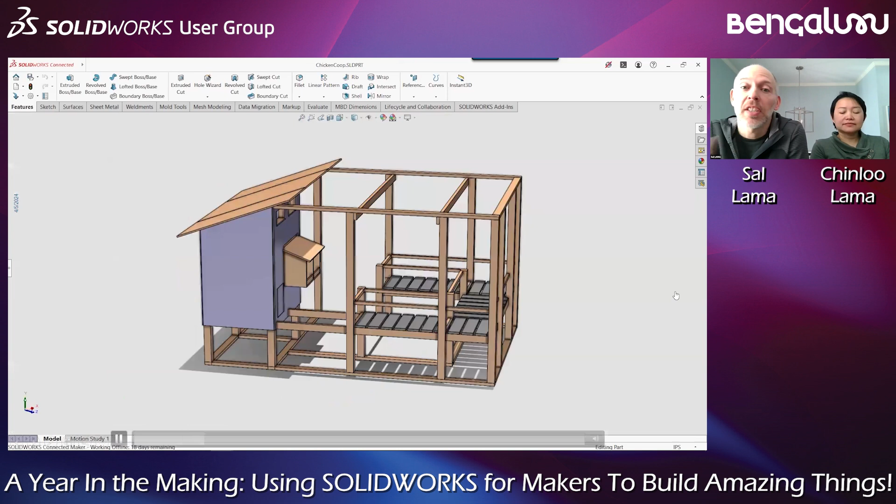Sometimes the software we're going to choose kind of chooses itself. This is a chicken coop garden that we built for my father last year. We knew it was going to be a bunch of structural wood—2x4s, 4x4s—so weldments immediately sprung to mind. Because SolidWorks has weldments and X Design doesn't, we chose SolidWorks because it was the most appropriate tool for the job.

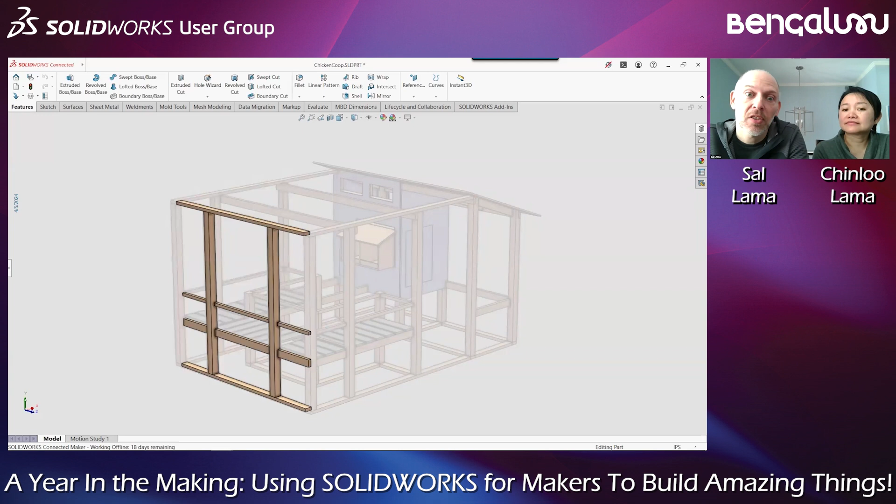What's cool about weldments, if you haven't used it before, is it lets you build geometry like this super fast. But then it also has the downstream benefits of giving you cut lists and making the drawings and all this other stuff. We actually packed the car up with our tools, drove 20 hours to visit my parents, and worked in their backyard cutting up wood and building a chicken coop.

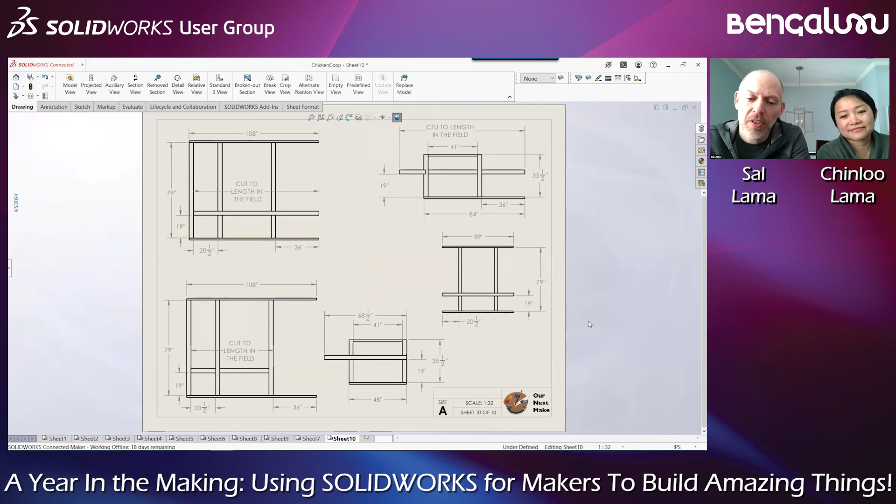Having these drawings on hand and being able to get the cut list so we could go order the stuff at the home center was a lifesaver.

Another example of where the software chose itself was this project where we built a standing adjustable desk. We were working at home quite a bit last year, and we wanted to build something out of cardboard or corrugated board. Although corrugated board folds differently than sheet metal, we knew we could get pretty close to a flat pattern if we used SolidWorks sheet metal.

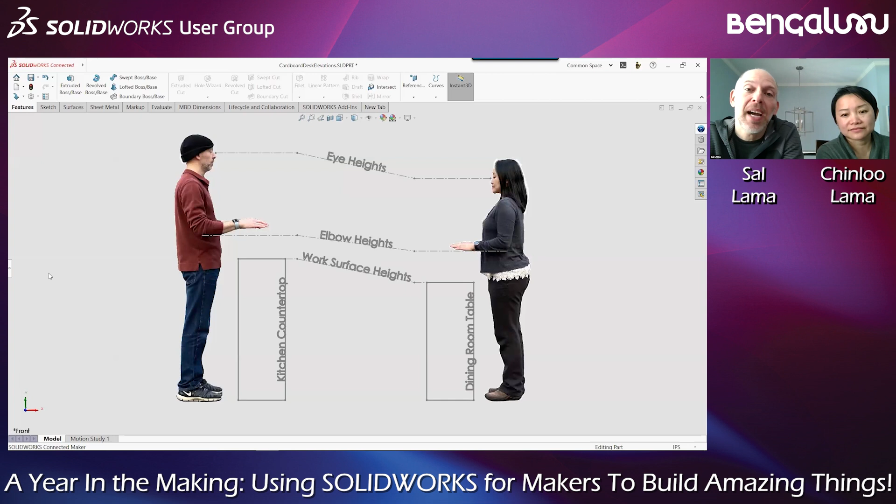So we used SolidWorks sheet metal to flatten out the corrugated boards. I don't know if you've ever been immortalized in CAD before, but there we are, Chinloo and me, standing inside of SolidWorks. We built this adjustable desk system so we can bring our laptops or iPads up to the appropriate height.

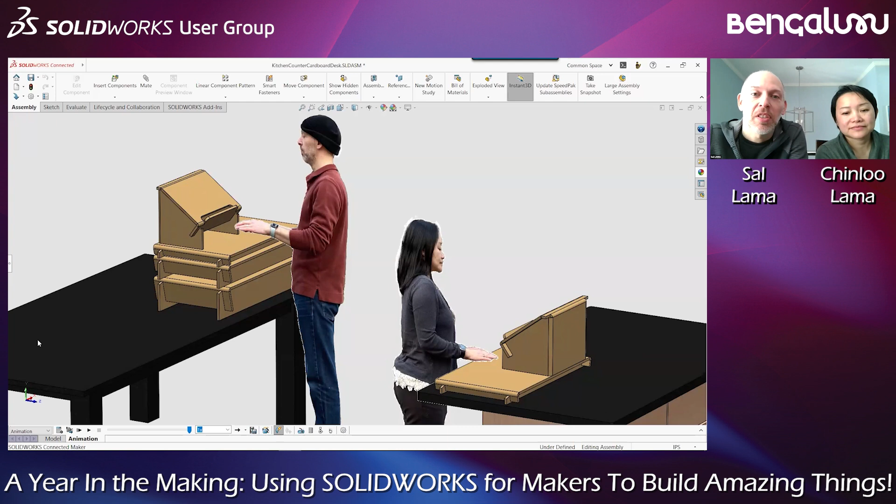Again, that was a choice for SolidWorks. One last case—this is our can rack. We go through a lot of cans of beans in our house; that's our favorite form of protein these days.

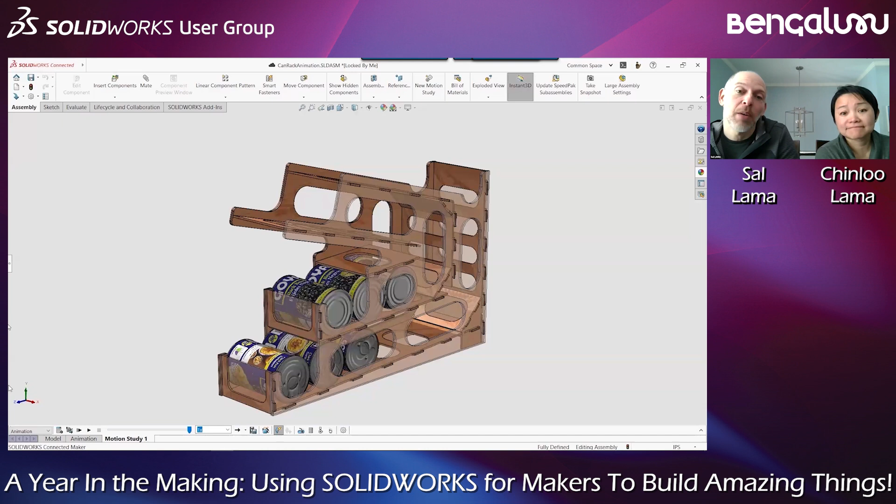Because I was going to use tab and slot quite a bit to hold these pieces together, and SolidWorks has a great tab and slot command, we went right to it. We're very much proponents of choosing the right software to get the job done, and these are three examples of where SolidWorks was the go-to choice.

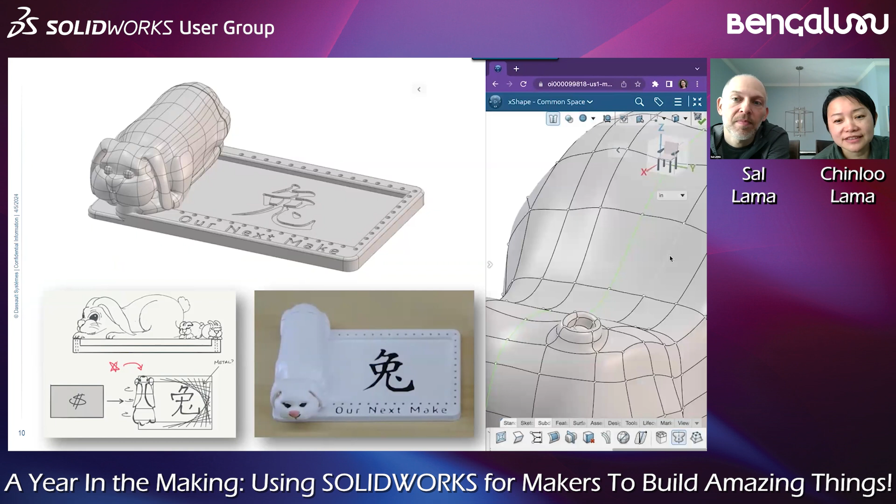In some of our projects where we knew we wanted to incorporate organic shapes, what you see on the right is a little hippopotamus rest for chopsticks or paintbrushes. On the left was this fun rabbit gift card holder, something I wanted to explore if we could 3D print directly. Having X-Shape with the subdivision modeling engine, I was able to do clay-like pushing and pulling of the pieces and get close to what I was looking for. It was very enjoyable.

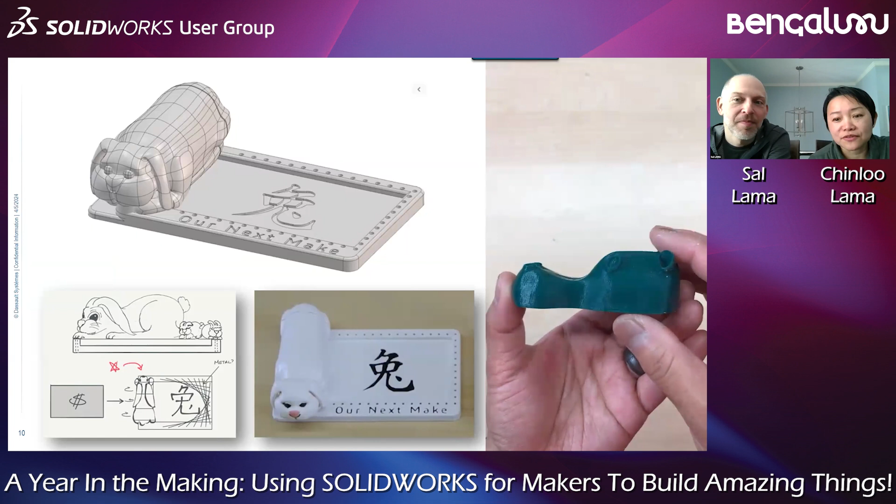I'm not an expert in any way, but being able to get something in my head, as you can see I sketched a few things out, and still get all of the connections and mechanisms working. The rabbit on the left actually spins and has multiple movements. We had little dimples in there to hold all the pieces, and it was really nice to hop between X-Shape and X-Design, or even stay within X-Shape to do all of the Boolean work I needed before I printed.

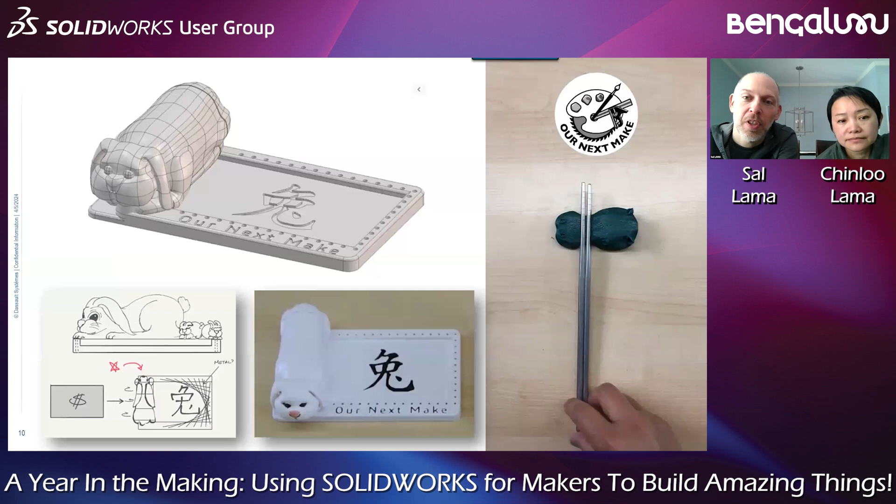I thought I heard somebody try to come online. Was there a question? We can pause anytime. No? Okay, all right. Again, don't be bashful.

So also within the Makers offering, we have the web apps, as we mentioned before, with X-Shape being one of the modeling tools. X-Design is also one, and we often rely on the ability to access the software on a mobile device.

One of the southernmost states of America, in the summer, trying to build a chicken coop. That's just my parents' garage, and we're getting the dimensions we need to build the project. So no hauling pieces of paper, we just pulled out a device and talked about it for the day and went on.

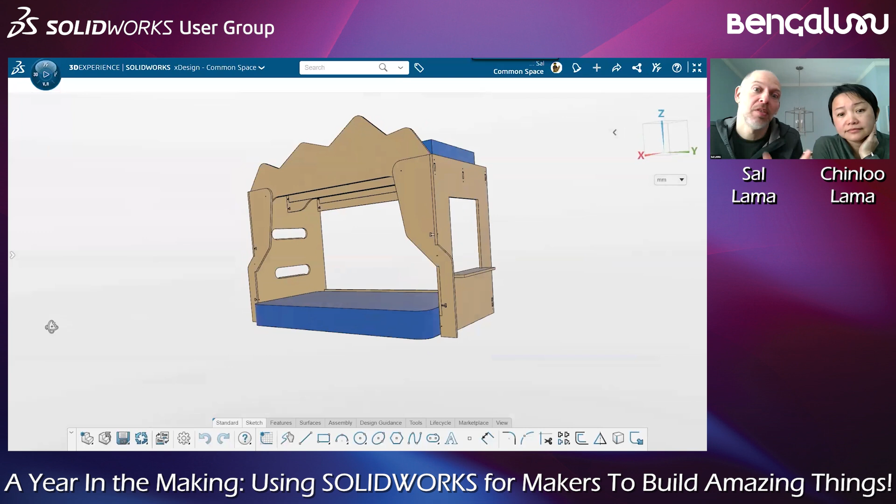Home by Me is a free online tool that runs in a browser, meant to build your home, lay out your home design, but any sort of building really. What you just saw there was a bunk bed that I designed for our son. Our son was in college and moving out of the campus dorms into an apartment, sharing a very small bedroom with another friend, and he said, Dad, we really need a bunk bed.

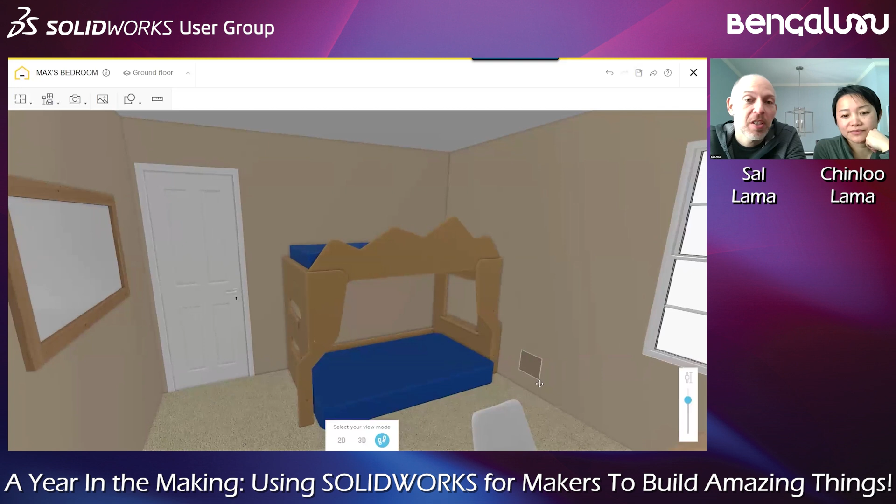And so I designed it in X-Design, but then to see how it would look in his bedroom, he gave me the dimensions, and in Home by Me, I was able to quickly model the room, put the bed in the room, and feel what it would look like, before we ever actually cut anything. So Home by Me is just that next really cool level.

You can use it all by itself and just use it to design a home, or you can use it as we did to bring X-Design geometry or X-Shape, and even SolidWorks, so it doesn't matter. You can push the data up into Home by Me.

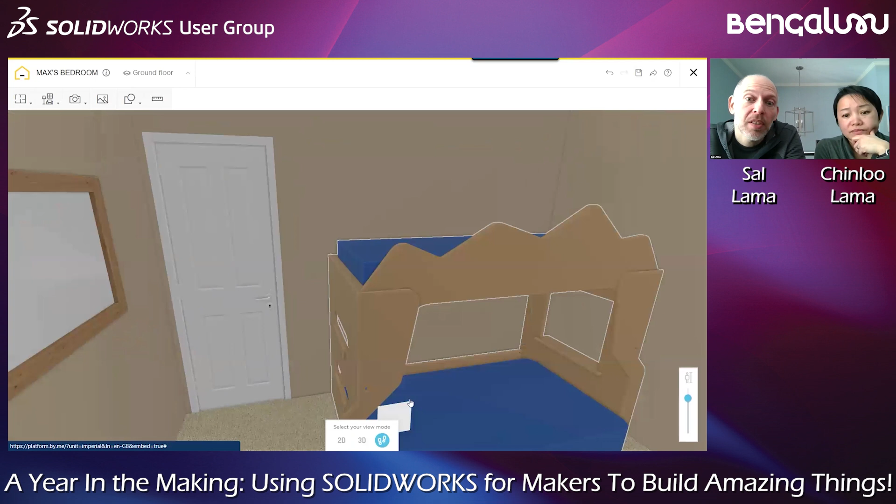What's even more cool these days is X-Design, all the X apps have the ability to pull Home by Me data back into X-Design. So if you want to actually model your bunk bed while you're in your bedroom, you can actually pull that model into X-Design and continue to design. So it's really a cool blend of the two technologies. So that's Home by Me.

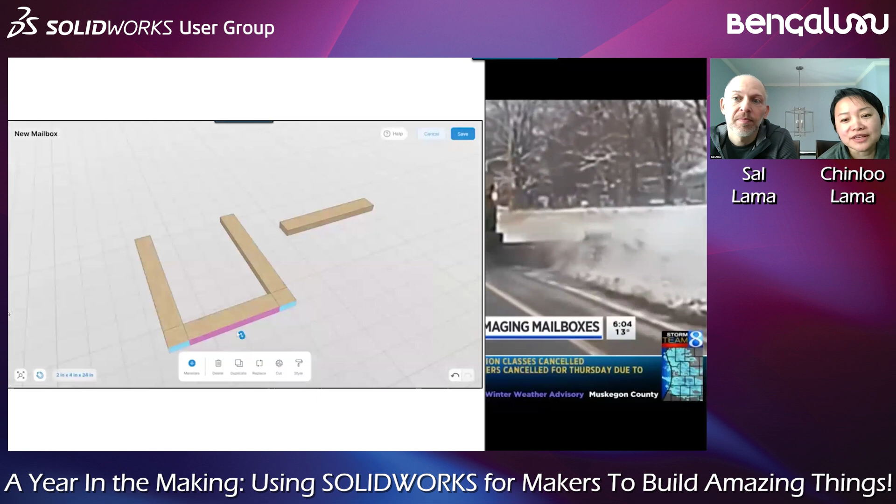And for me, one of our projects was to update our mailboxes. You can see here in the video on the right, we get a lot of snow here. So our mailboxes tend to get demolished by the annual snow plow. And for us to really quickly capture some ideas on a new design, I leveraged Make by Me.

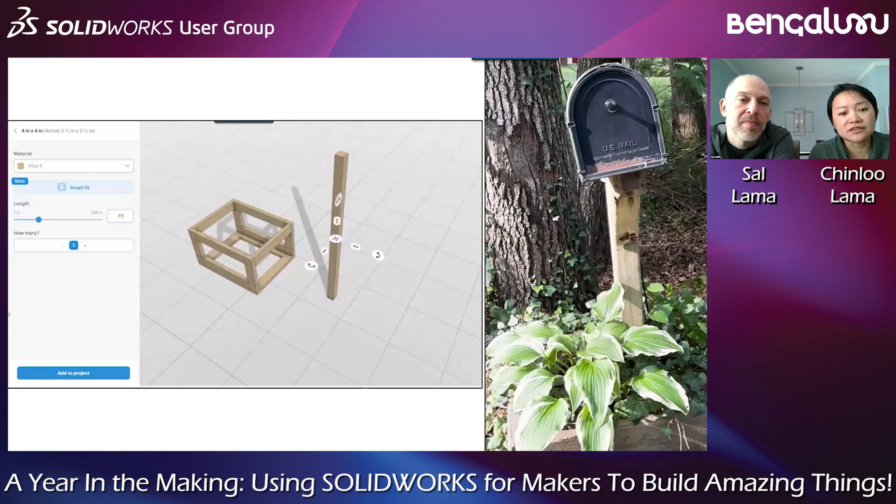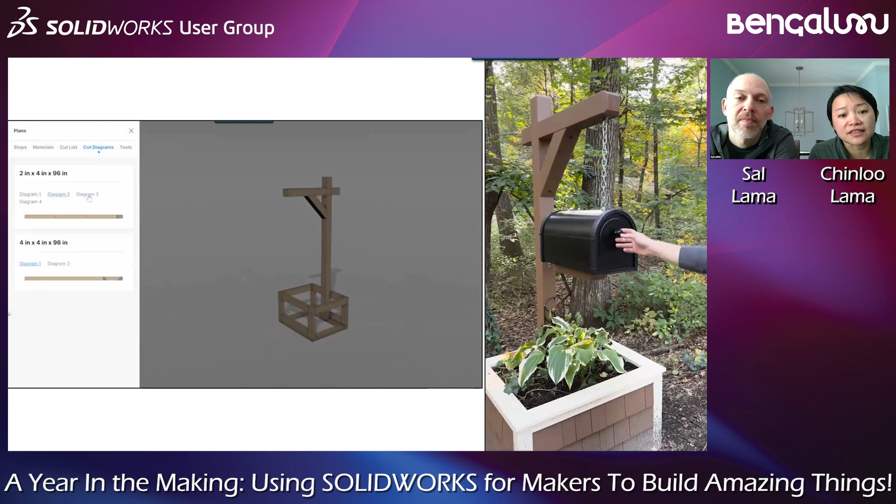Make by Me is this free online tool that allows you to pull your creation together, but using traditional lumber, standard lumber pieces that you would actually pick up at a home center. And so being able to just go out there as if I'm in the shop pulling some expensive pieces of lumber together, I could do this virtually and just snap pieces of wood together and understand how much I would need, how it looks. It comes with a cut list and plenty of information that allows me to then communicate with Sal about, is this a design that we want to work with?

And I think we built like 3 different variations in Make by Me before we decided that this is the one we wanted to go with. So a very quick tool to ideate, but also practical to actually bring it to fabrication state.

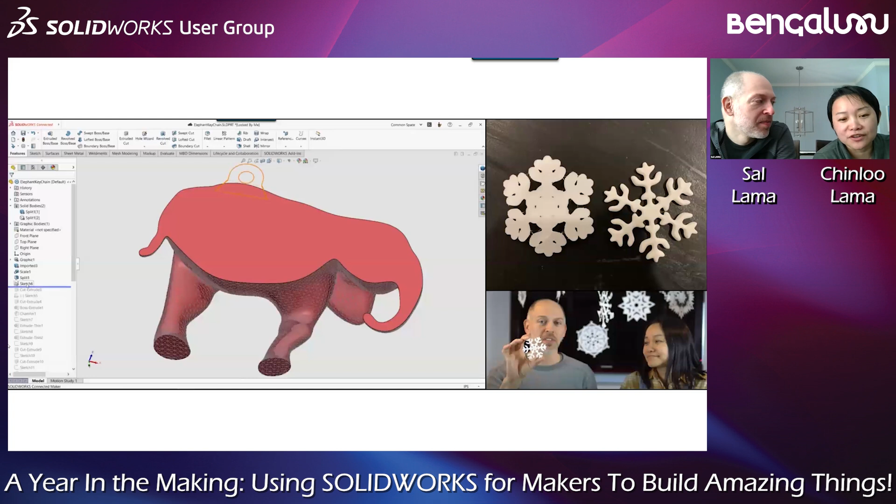And for apps for kids, I know the name sounds like it's for children to play with. I'm sure you guys have seen this before, but if you haven't, it is like this digital clay or Play-Doh tool that kids can go in there and just mush together and play. And I had fun in one of my exercises designing this endangered species of elephant from Asia.

And Sal was inspired by seeing this elephant and thought we could probably do something more with it and make it into a gift for our nephew. So I was able to export the elephant out, or I think you exported it. Anyway, you could share your creation on the gallery, and I think he might have pulled it from there. But by doing so, you can bring the mesh object over into Solidworks, xDesign, either of the CAD tools, and he was able to build all of the appropriate components to then bring it to reality.

He'll go deeper into that, but also on the right, even though it's a tool for kids to play with, you could see that with a very quick few pulls and push of the digital clay, I was able to also create snowflakes and coasters and all sorts of stuff. So this is not a tool just for kids.

It's all sorts of folks who've never been introduced to CAD through traditional engineering skills, but it's fun, not very intimidating to use, and you can also export to 3D printing. So that's what that's on the screen.

Yeah, the technology in apps for kids is very similar subdivisional modeling as you find in xShape. So if anyone's like, I want to test drive something right now, you can go to apps for kids and play with sub-D technology, which is really cool.

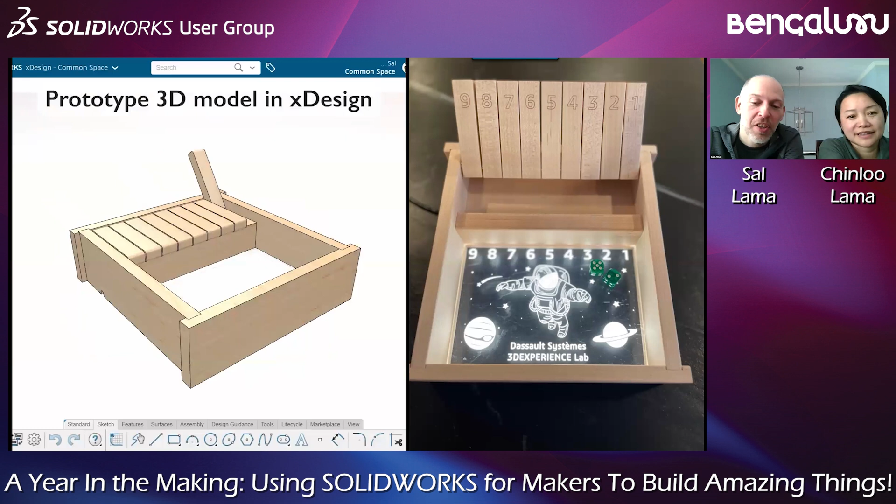That bit was mostly about the software and the designing of it. Now we have to get into more of the making. Above we talked about wanting to show a variety of software to inspire people to design things. In the same vein, we like to show a wide variety of ways to make things, because you can make things with a pair of scissors, a laser cutter, and everything in between. We want to show people that variety.

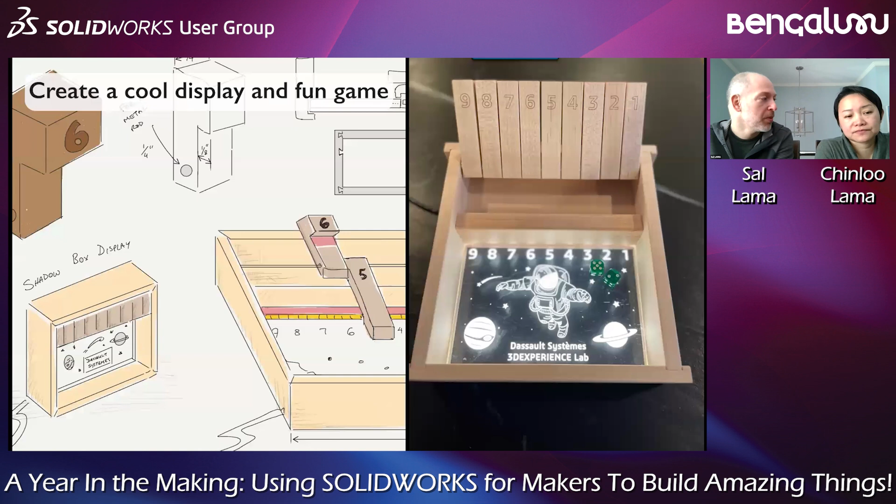So this is one example of that. We created this thing called Shut the Box. It's actually a game. But before we went down this path of creating a game, we were asked to celebrate the accomplishments of college students who had won a competition with NASA, and they came to visit our campus. We thought it'd be nice to give them a commemorative plaque, but wouldn't it be even more cool if we could let them put together their own award, and at the same time have something they can always play with afterwards. So we decided to incorporate a game.

It's called Shut the Box. It's this single player, multiplayer experience where you're throwing dice to see if you can capture the different digits that are now these little fingers on the mechanism. The goal of the game is every time you throw the dice down, you're able to close down the pins that can either represent the number you rolled or combine to meet the number on the dice.

With this concept, we wanted to bring in all the different elements of fabrication we can get from the 3D Experience Lab. It's a fab lab at our office, and we have a laser cutter, an electronics corner, and a CNC. We wanted to leverage all of those to represent this trophy, I guess. So we got to play with light piping, engraving on acrylic, got to solder some wires, and just really work with beautiful wood.

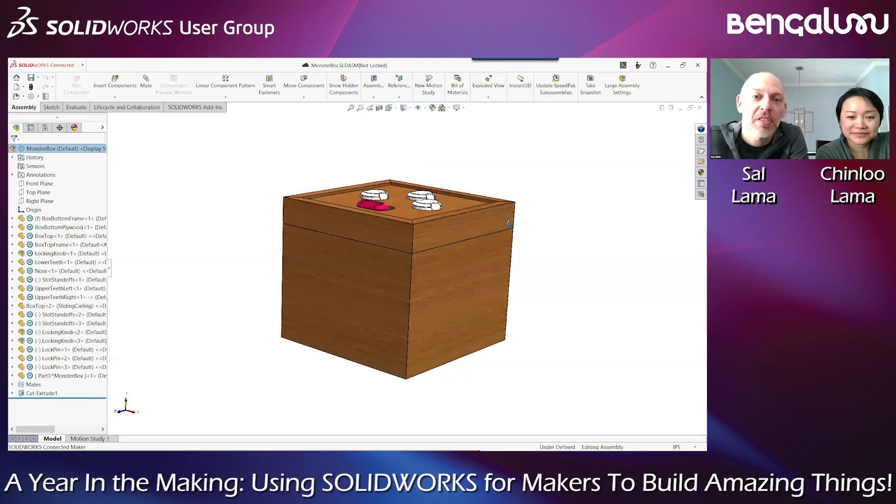This is it in SolidWorks. It's a pretty standard assembly. What's cool about it is the mechanism, so let me show you the animator. We'll talk more about how we use SolidWorks Animator in the future, but this is sort of how the box opens.

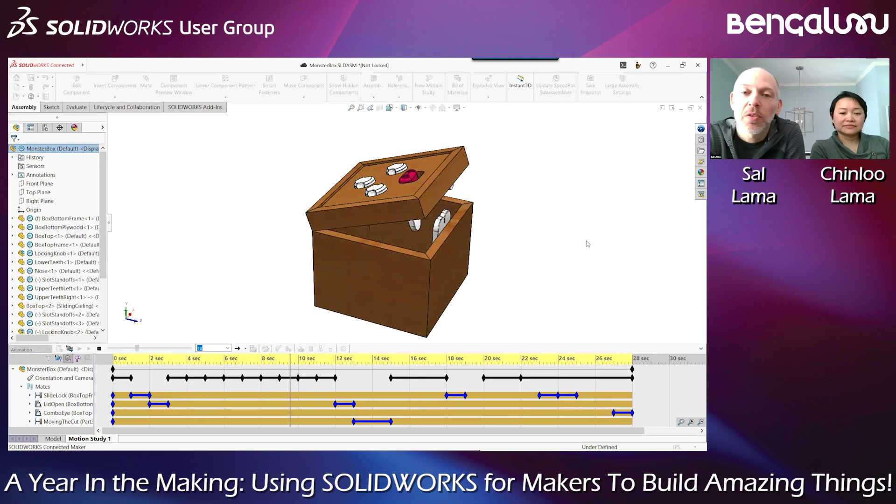You slide the nose backwards, and that unlocks the actual box. You'll get a closer view—there's a little tab that goes inside those two front teeth at the bottom. And then the knobs themselves are actually how you lock it.

If you slide the nose forward, that engages the tab in the front, and then the knobs turn. You see that little black metal pin—right now it's able to slide through a slot in the knobs, but when you turn the knobs, it can't slide anymore.

What's really cool about the knobs is it's a two-piece design, so you can actually take the two pieces apart, re-index that bottom piece into the knob, and basically change the combination at will.

That was a really fun thing to come up with, figure out, and troubleshoot, because the tolerances when working with 3D printing are pretty good, but with wood, sometimes your drill's not in the right spot. That was a really fun project, using SolidWorks in this case to troubleshoot and also to communicate like I'm doing with you here.

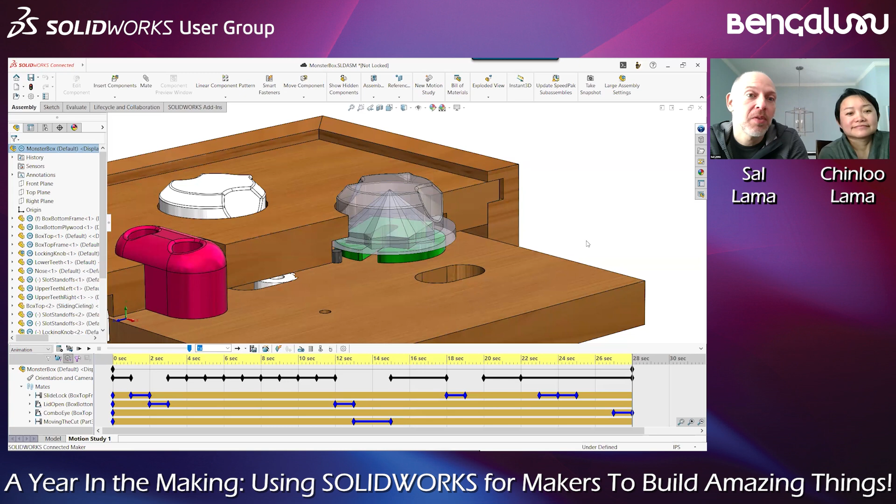We just naturally thought this way and communicated to each other this way, but when we shared this as part of the reel or video on TikTok, Instagram, YouTube, it went viral. It was interesting—we had more than 1 million views on TikTok or Instagram, where people were just commenting and being very inspired or blown away.

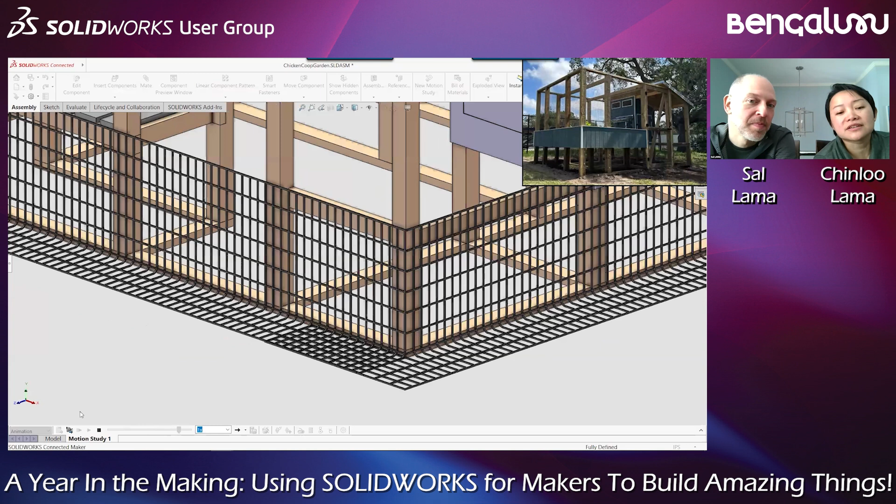One of the comments was like, 'dude was ready with a 3D model to explain this.' It really excited people about understanding what we were trying to say, and engaged folks, allowing them to ask questions both about the software and about the approach.

We went with how we wanted to design it—in fact, this is actually illustrating a solution we didn't take. We had done it differently, and this was us saying, hey, next time when we do this, we would design it this way and fold it over, overlap, to make it even stronger.

So it was appreciated in many forms, but more of the story is that we didn't just use CAD to show or help us build something, but we were using it to show other people how it was working and how they should build it. I think you probably all know that CAD is a great communication tool in your companies and businesses, but it's great for just anyone to understand.

Jimmy, was that you about to come online? I thought I saw your name. Yeah.

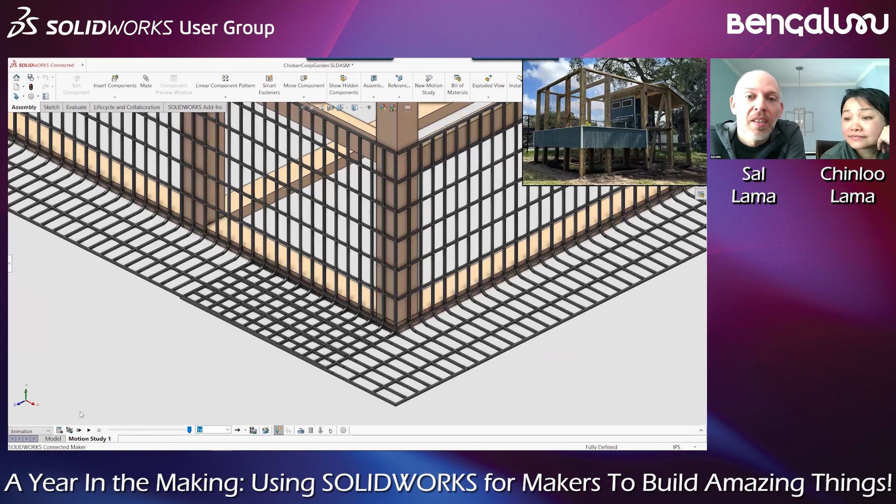Oh no, I modeled that. That was just, I think I did an extrude and then a pattern of the body, and then a couple more extrudes, and it was done.

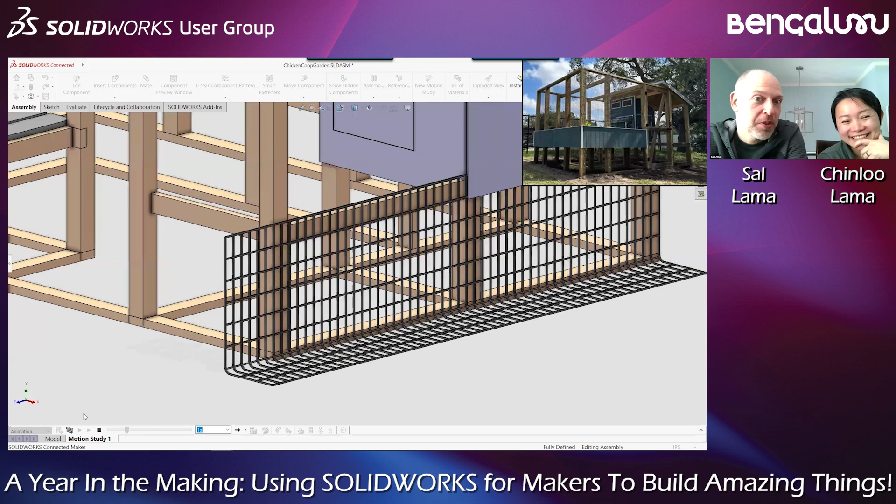Yeah, because let's look at it closely. I don't remember if it would be a very natural thing to think about it as sheet metal, to make a cut of the rectangle, pattern it out, and then just fold it. And I either did that, Jimmy, or I went with a body and then just a two configuration kind of thing.

We'll dig into it towards the end. How about that? Yeah, I'm sure we'll have time. We can pull it up. Good question. Yeah.

You can animate the movement of an assembly cut, and that's how I animate the section views. But I had to do that, animate the section view, then animate the rising of the water, and then the lowering of some of it. There's like three things going on in there.

It's crazy, because the way the siphon works is the whole level outside fills up, then it overflows, then it drains. So it was some work, but it just goes to show that you can do that level of interesting animation with SolidWorks.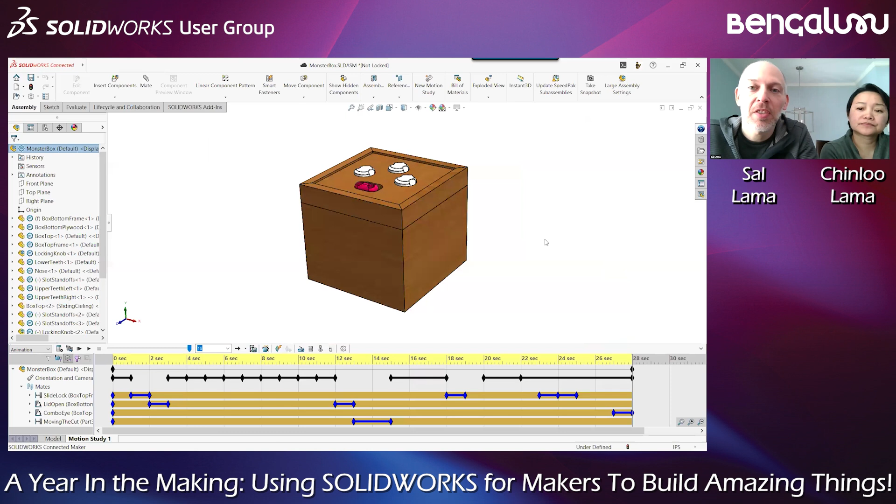This, as we said, is 3D Experience SolidWorks Professional. And because it's 3D Experience SolidWorks, all of the things you need to work with the platform are built right in. So number one, you'll see my little Lego icon here. I'm logged in as me.

So first of all, you're logged into SolidWorks, which you wouldn't have been doing in the past. From here, you can actually work offline if you need to. But I often stay connected because I have a nice, reliable system, so I'm connected to the 3D Experience platform. Everything I do is the exact same thing as I would do if this was just regular SolidWorks. I'm creating new files on my local hard drive and saving them to my local hard drive.

Now, in the display pane of the feature manager, you'll notice there's a new tab. Typically, you just see where you can change your colors, hide-show states, and so on. But there's built-in data related information. I can see all these green keys mean I have all of these things locked. So Chinloo, she could open it, she could edit it, but she couldn't save it back to the platform. This one's not locked. You can see the current revision, the fact that it's the latest revision. So it's all right at your fingertips, a glance about what's going on in the platform.

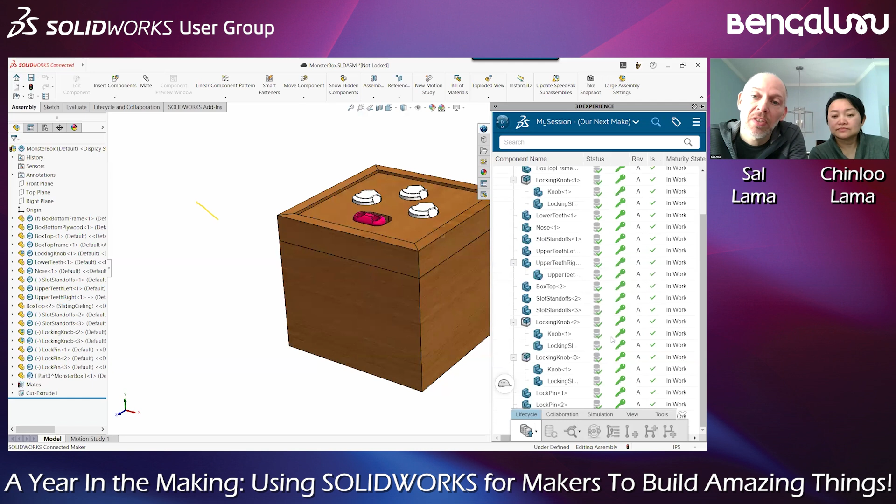On the right-hand side in the task pane, let me move this for you, I have an even more detailed view of all the stuff in this assembly. You can see that the top level has been changed in this session, so I was modifying it. It hasn't been saved back to the platform, but everything else is in line, what's on my machine is the same as what's on the platform.

So right inside of SolidWorks, you have a lot of capability to keep things organized. But beyond the CAD, because we build maybe as much non-CAD data as we do CAD data, I'll let Chinloo talk about some of these other things.

Yeah, so beyond the file management or content management on the CAD side of things, you could also manage other things like ideas and documentation, all within the 3DSwym app that's part of the offering. And one of the ways we leverage 3DSwym is there's an idea funnel that can be used. Let me just show you everything in context.

We have the ability on our tenant to create as many communities as we like. We actually have a community called Projects where we collect all of our ideas, and we come up with a ton of ideas constantly every single day. This is a great way to manage it. It has ways for you to bring the ideas forward. If not, it just kind of sits in the parking lot until you're ready to do so. We actually have quite a few that we've accomplished, brought into reality and made into an episode.

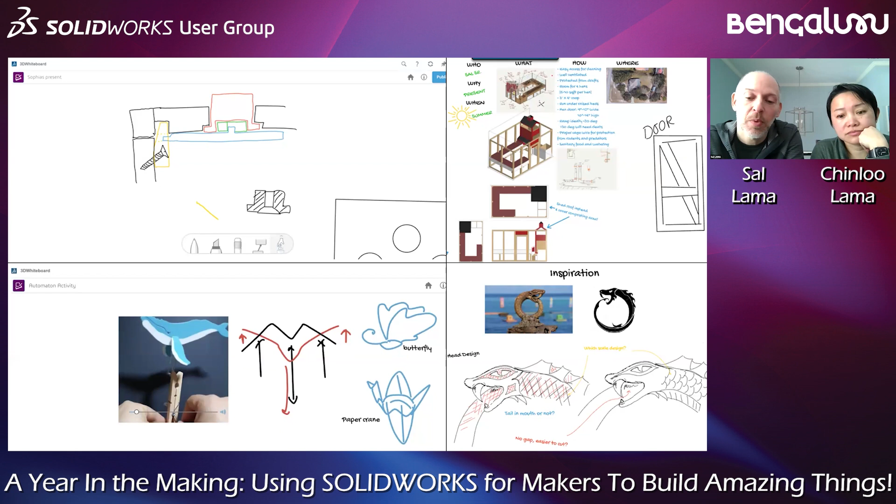Yeah, it's a great equivalent to standing in front of the physical whiteboard and drawing. So it's a great way to kind of get your ideas down. It just goes to show that there are so many other really valuable things just by starting to log into the platform. You get all these other applications, and you can decide where they fit for your workflow. But for us, we find great value in it.

And the last thing I wanted to talk about that we use a lot is 3D Drive. So you may be familiar with Google Drive or Dropbox and things like that. 3D Drive is sort of, you can correlate it to that. It's a place to store any file-based data. The platform, obviously, it's a database - you're saving your CAD files into a database - but 3D Drive is meant for files.

So let me try and navigate and talk at the same time. The way that Chinloo and I work is I do all my best work in the morning when the sun rises, and Chinloo does all of her best work when the sun sets. I was born in Malaysia. Yeah, she was born on the other side. So often she'll be working on editing videos while I'm ready to go to bed, and when I wake up in the morning, the videos are ready for me to review. So it actually becomes a really cool way to be efficient workers.

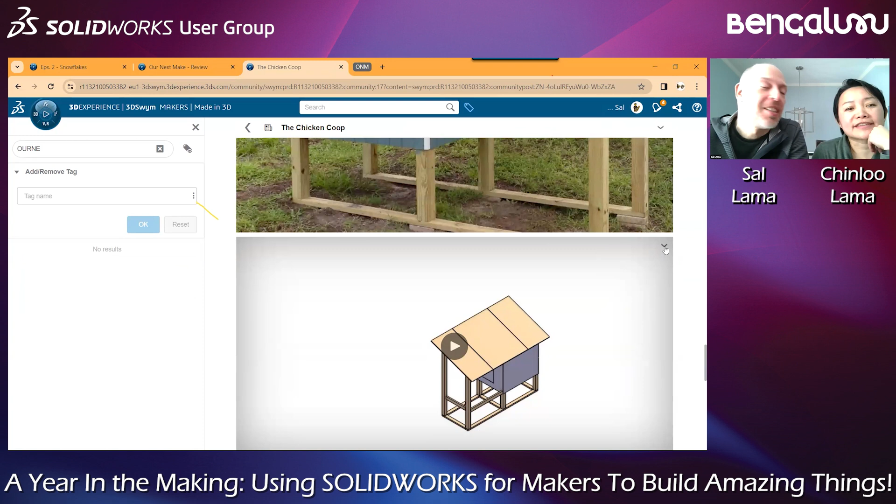So to the specific question, I think it was you, Jimmy, asking if we had the file shareable—may or may not be here. But the idea is at the end of a post there's either a zip file, or sometimes the model is embedded in the viewer and you can click download. So those are your two ways to get content.

Let me actually go to another post just to show here—a box fit for an airbender. So at the bottom of this one there's the zip file. So those are the two ways that you can grab our data. And again, we try to share every project, we always share every project that makes sense. If the file doesn't make sense to be shared, we just don't.

Just a note though, we do often share things in STL and STEP form, especially for 3D printing, but we can't always share native files appropriately, because just so you know, with Makers, anything created in SolidWorks for Makers cannot be brought into professional licensed SolidWorks. So it's just something that's watermarked and you won't be able to import it. That's one of the reasons why you see the formats that we share—it's meant to be more universal so everyone can access it.

I do tend to still put the native files in there, but because I know how many people can actually benefit from it is limited—if you don't have Makers—I will always include a STEP and/or an STL, just so you have all kinds of flexibility. That's a great point there, Chinloo. So yeah, we share all of our data in Made in 3D.